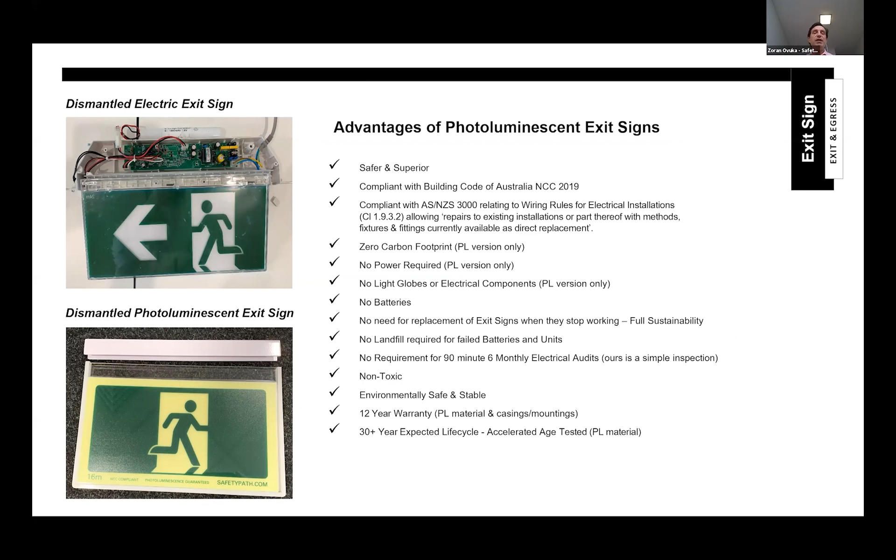That gives us a whole new opportunity to innovate in how we see our roads, making them better and safer. One of the things in terms of this technology, if we look at what's considered visible or safe enough around the world, in Europe the marker for safety of signage visibility using photoluminescence is 2.8 millicandelas per meter squared.

We can elaborate on this, and if you have further questions following this presentation, we can interact with you and give some background on what this all means. Essentially, it's about what the human eye sees, and how strong the signage should be for best visibility. In Europe, they're at 2.8 millicandelas for visibility. In the USA, they're at 5 millicandelas. And in Australia, we're at 30 millicandelas.

Australia was kind of late coming on board with photoluminescence in terms of infrastructure, but they've set the biggest benchmark. When we look at our performance, we way surpass even the local requirements, and our aim is to really make light from photons all night long in the future. So we are now able to provide systems which are very, very high performing and give great possibilities in road safety, signage, line marking, and so forth.

One of these solutions, as you can see in this next slide, is signage. What happens with signage is that it meets all the high grade class 1W, or however you refer to it, high-end reflectivity requirements, but also self-illumination. Reflectivity is only good when you have light at the right angle coming into it. By having self-illumination, if you're going around curves or going up and down, you get better visibility of a particular sign.

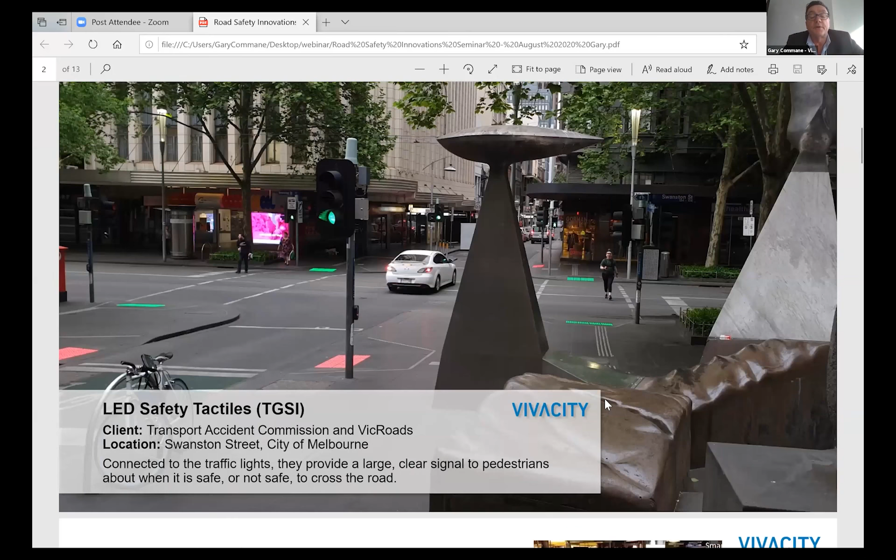Okay, the LED, this is the tactiles that we installed into the City of Melbourne. This is a project we did with TAC and VicRoads. We started this about 2 years ago, and the first installation was done in the City of Melbourne at Little Collins and Swanston Street, which you can see in that picture there.

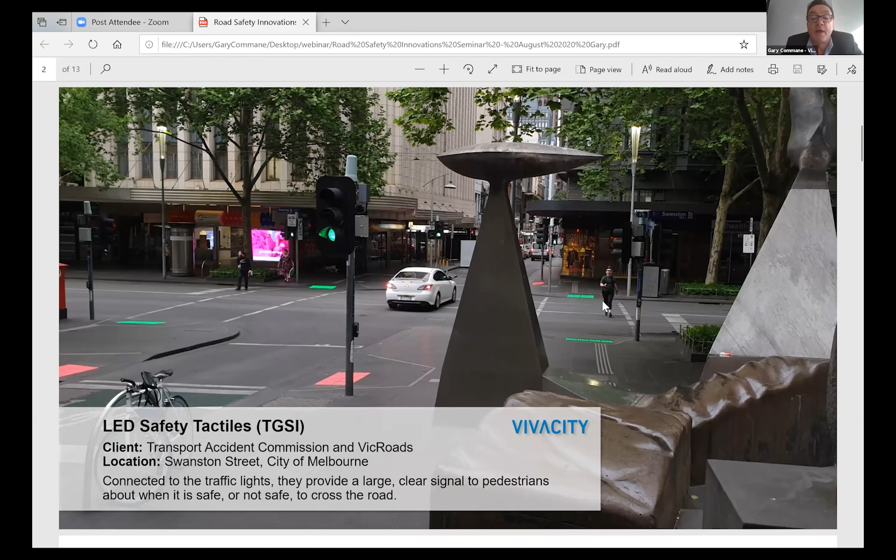The tactiles were initially designed to help with the problem of people not looking up from their phones before stepping onto the road. The Vivacity safety blocks are installed in rows on the curb side of the intersection. They are connected to the traffic pedestrian lights and shine the same color as the pedestrian lights to create awareness of signal change at the intersection.

So when the green man is green, these are green. When they're red, they're red. When they blink, ours blink as well. So pedestrians are more cautious of traffic and have quick awareness of signal change.

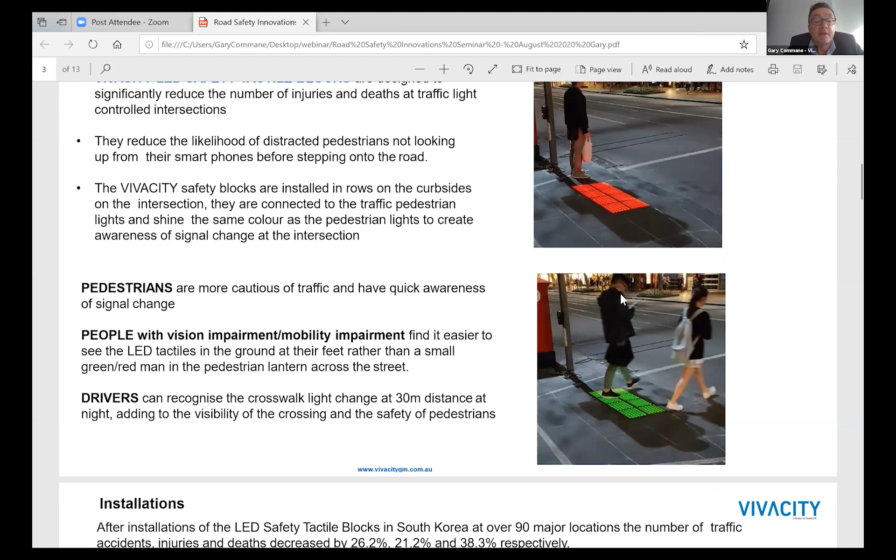People with vision impairment or mobility impairment find it easier to see the LED tactiles in the ground at their feet rather than a small green man in a pedestrian lantern across the street. Also, drivers can recognize the crosswalk light change at 30 meters distance at night, adding to the visibility of the crossing and the safety of the pedestrian.

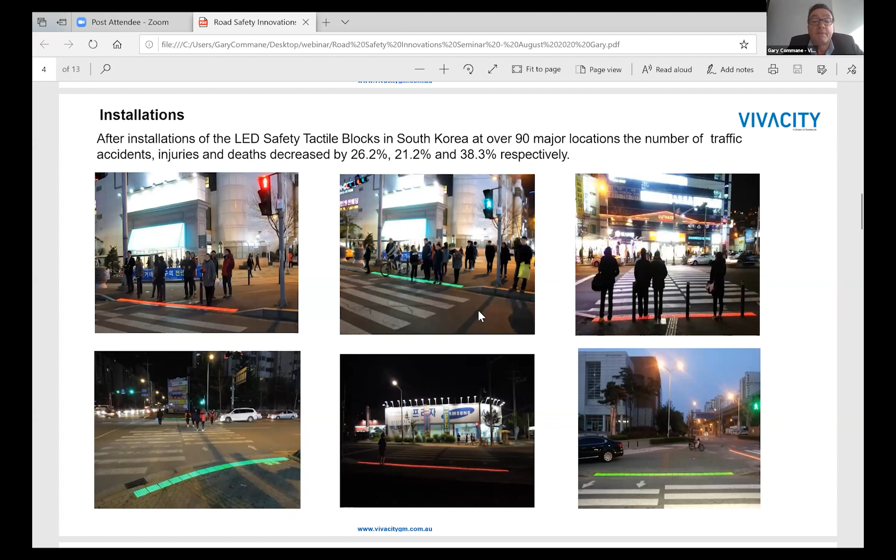The technology comes out of South Korea. After installations at 90 intersections, the number of traffic accidents, injuries, and deaths decreased by 26.2%, 21.2%, and 38.3% respectively.

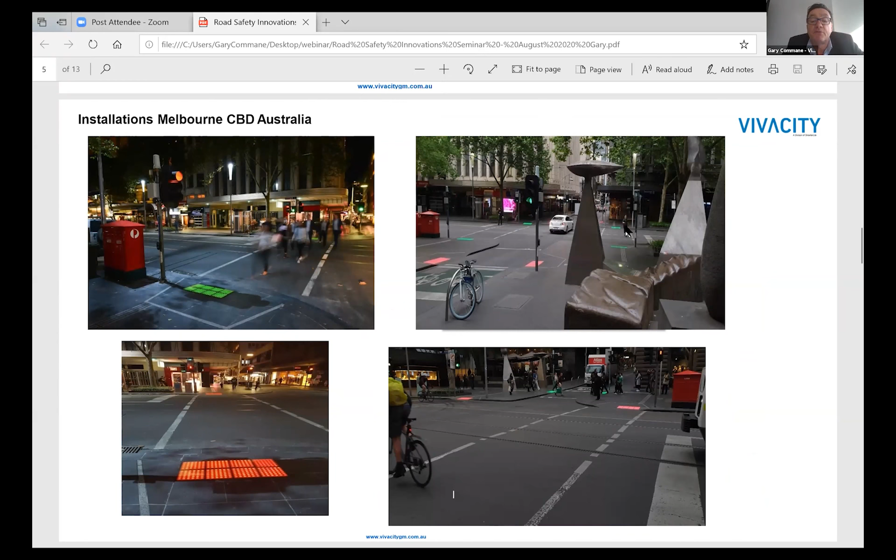The next slide here shows the installation in Melbourne. The images on the left are nighttime visibility, and the images on the right are daytime visibility. What we have done in these particular units is fitted into our control box ambient sensors, so these sensors pick up the daylight, how much light's available, and they dim these tactiles down accordingly.

So during the night, these tactiles are dimmed down to about 70% of the daytime brightness. This is obviously adjustable, but this is what we set with City of Melbourne VicRoads to make this intersection perfect in day and in night.

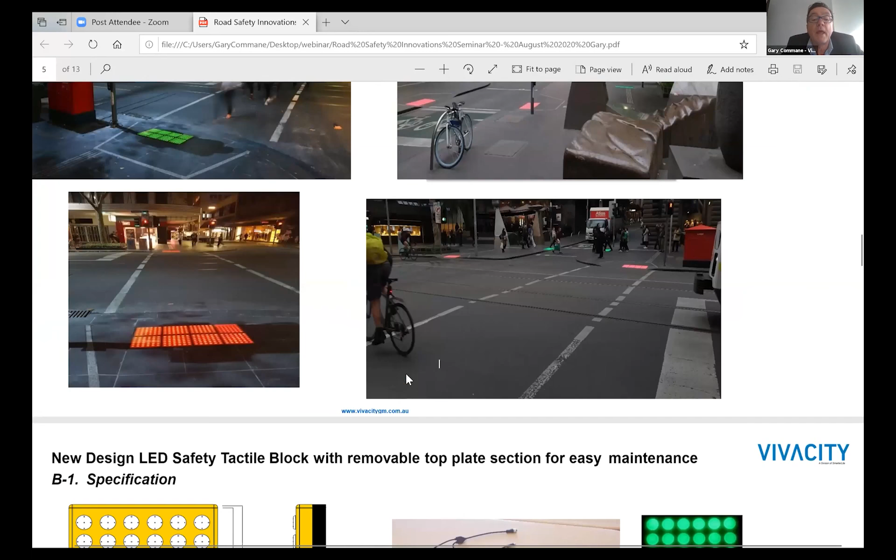So what is a tactile? Basically, our LED tactile is the exact same as a normal standard TGSI, which you can see on the left. It is the same dimensions, has the same number of bumps and lumps. Everything is the exact same as a tactile block. All we've done is added our technology to an existing tactile.

Our tactile consists of 2 parts: the base plate, which is fitted into the ground first, and we supply the DC wires, and this is our top plate, which changes from red to green.

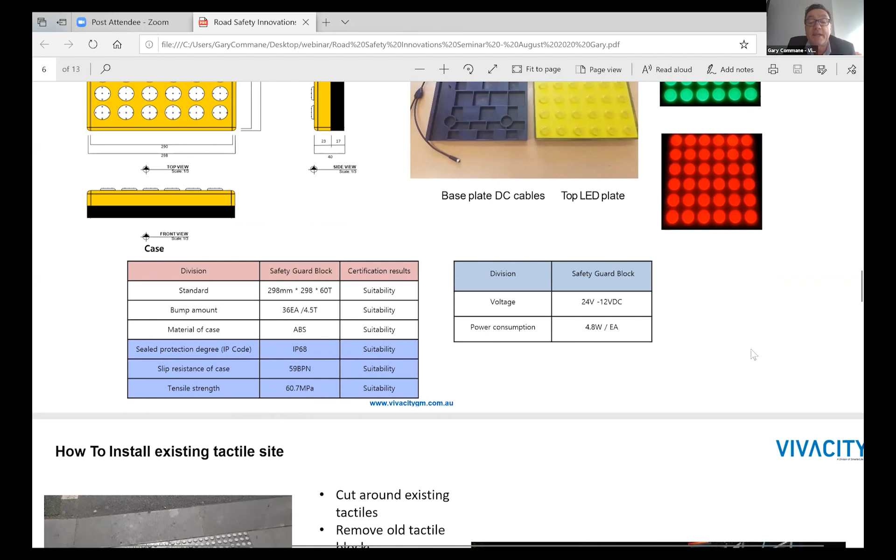Our tactile block is IP68. It passes all the slip resistant tests and tensile strength tests. It's low voltage, 24 volt DC, 4.8 watts, so it uses hardly any power.

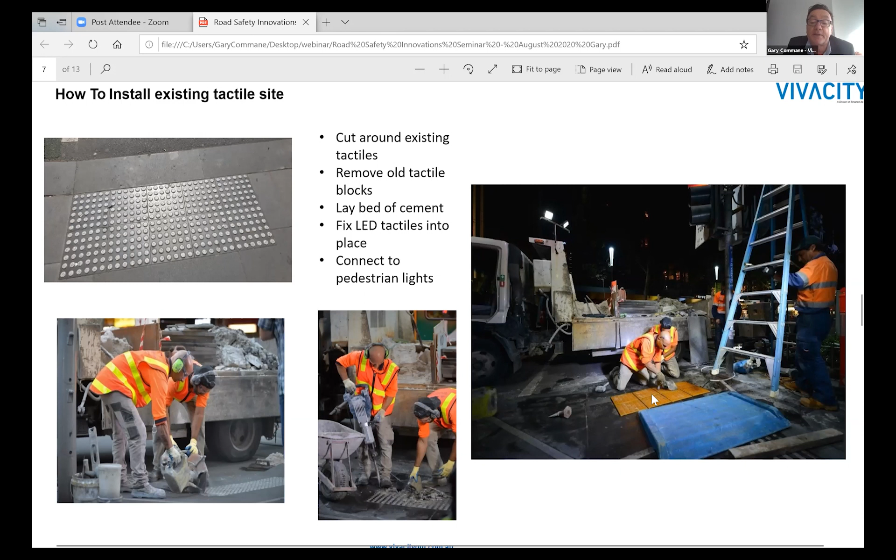To install our tactiles in the City of Melbourne, on the left you can see the existing tactiles. We just cut these tactiles out of the ground, lay a bed of cement, install our tactiles, and as you can see here, we just run a DC wire under the pavers, up the pole, and into the connection point of the pedestrian lights.

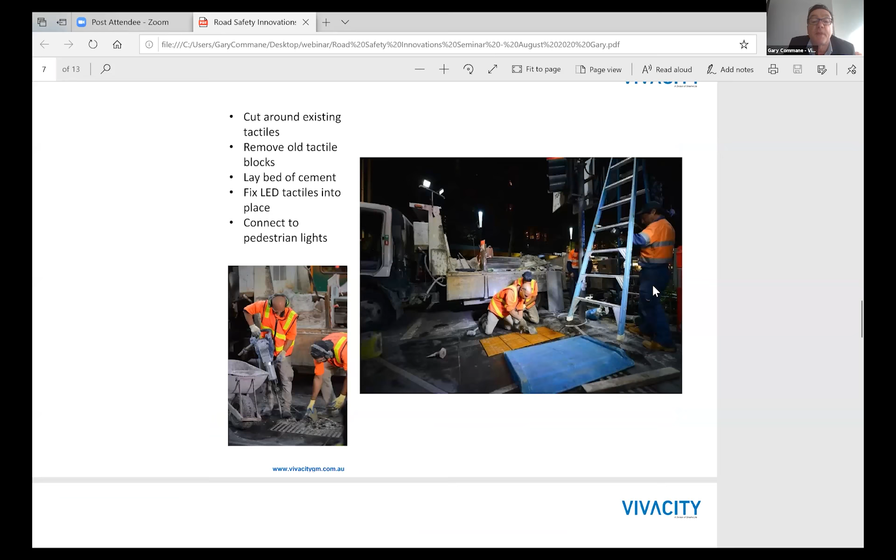If it's a new intersection, all we do is cut out the pavement, lay in our base tactiles, lay our DC wires into it, and connect the tactiles into it.

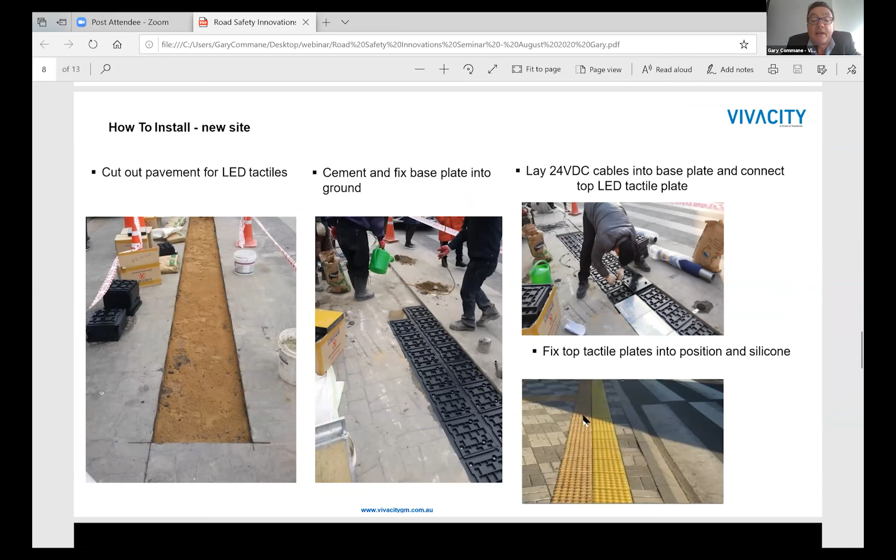So what I'm going to quickly show you now is what these tactiles look like. This is it here, this is the basic tactile.

This color is white. We can also make the tactile yellow, depending on what you want to have. City of Melbourne chose white because white seems to be the new color that's being used at the moment. As you can see, the top section of the tactile can be easily removed if ever we have a fault. There's a simple connection here that we can just take out of the top, unscrew it, and then fit a new tactile into position.

This is what the tactile looks like when it's illuminated. The tactile is normally red until someone comes along and pushes a button, and it changes it to green.

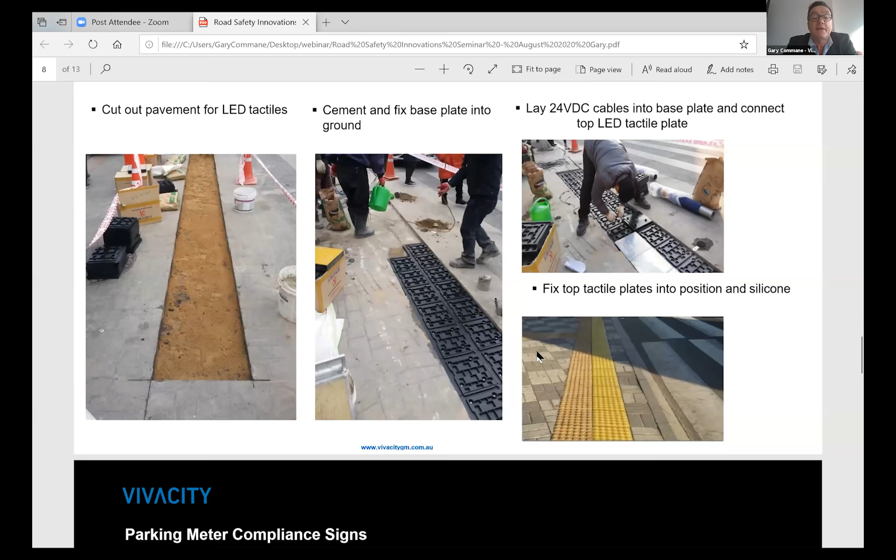Okay, I'm going to go back to the screen again, and we're going to go on to the next product. You probably would have seen these all around Melbourne. These are digital display boxes that we put on top of parking meters. This is a project we did with City of Melbourne, and it shows how we can make technology to solve a problem.

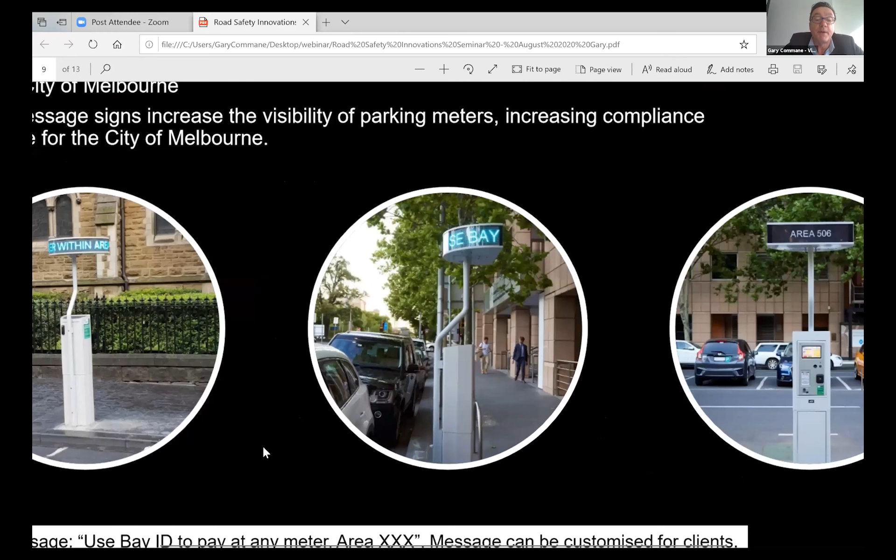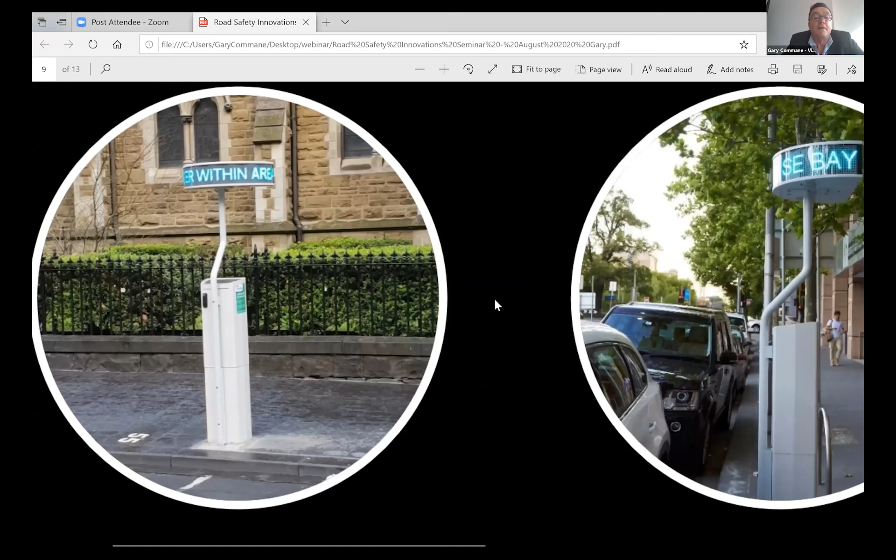The problem we had with parking meters was that people were avoiding paying parking fines by saying they couldn't see the parking meter because it was hidden by a car. So City of Melbourne asked us, could we develop something that made this parking meter more visible? The first brief was just put a light on top of a pole, and then it went from can you make the light flash, can you make the light spin?

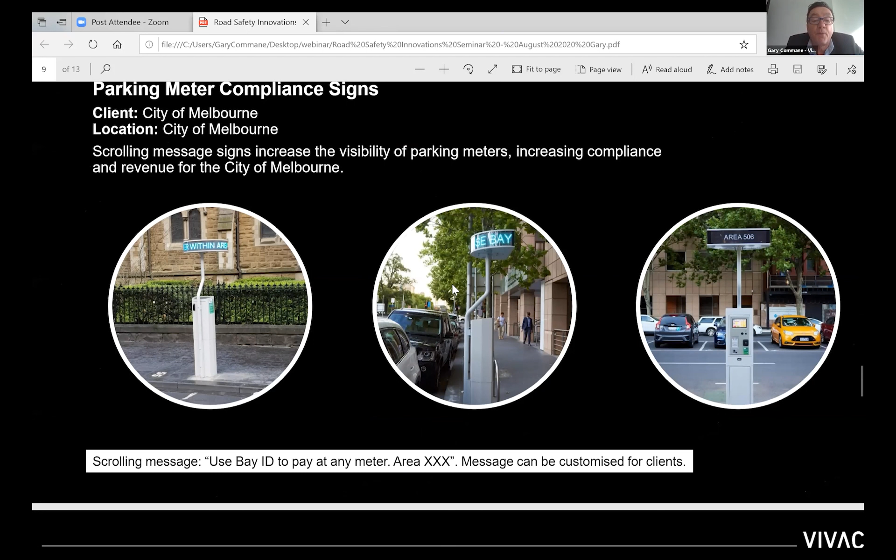In the end, we ended up having a full-blown digital screen. This screen shows the parking bay number and where the parking meter is. One of the other benefits is that we can schedule 6 months advance content into the screen, and it can also be remotely accessed if there's a problem or an emergency, to display an emergency message.

The next product I want to talk about is LED stud lights. These lights are quite unusual in that the ones on the left have no solar panels. The benefit is that we can install these units where there is little or no sunlight. The internal battery is a very high-end lithium battery, and when on permanently, they last for 5 years. If blinking, which is the normal way these operate, the life of these lights is 10 years. So basically you just put them into the ground and forget about them.

A quick look to show you what these lights look like: these are two very small lights. This section is the internal lithium battery. As you can see, they're not on - they only come on if I put my hand over them, and you can see it blinking. They have ambient sensors, so they come on at dusk or dawn. We can also have one that is on day and night - you can probably see this is in daylight and it's still quite visible. We recently installed 5 of these in the new police station on Swanston Street.

Right, let's go back onto the next project we're talking about.

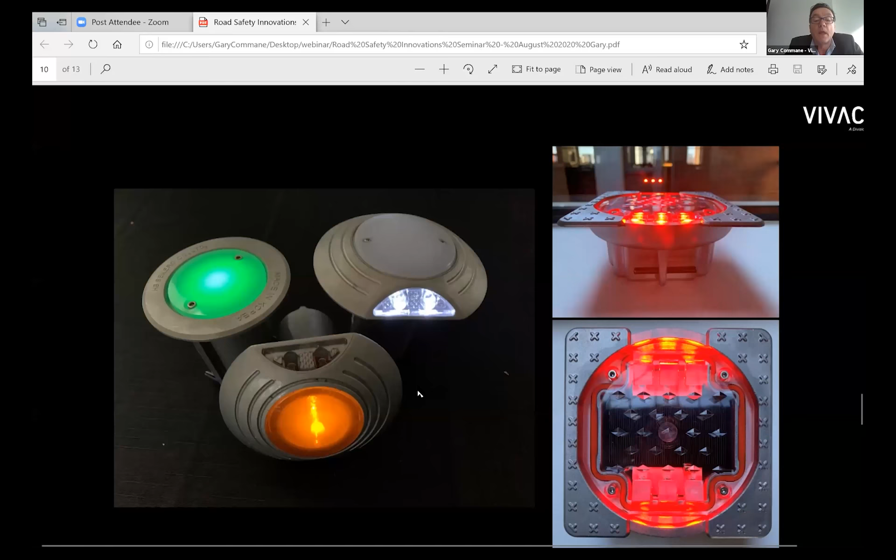This is a very clever unit that we developed recently. It's a high efficiency, low wattage solar light designed to fit bus and tram stop flagpoles. This is the project we're doing with PTV. It has an integrated light sensor which switches the light on in the evening and off in the morning. It's a very simple, no electric, secure plug and play type fixture.

At full brightness, this light provides 18 lux at ground level. An activity sensor detects motion, and if there is no motion, the light's brightness will reduce down to 70% after 2 hours, and 50% if there's no movement after 4 hours. If movement is detected, the light returns to the previous light level for that set period of time.

The benefit of this light is, again, when the brief we were given with PTV - I have a sample here - this light only weighs 5.4 kilos. It just has a very simple connection point here. It can fit on any pole up to 74 mil, and most poles you see on the road are 60 mil, so this can very quickly fit on top of it. It's a very simple plug and play system that can be used for buses, tram stops, but also for bike lanes, walking paths, anywhere you don't have power. These lights can very easily be installed.

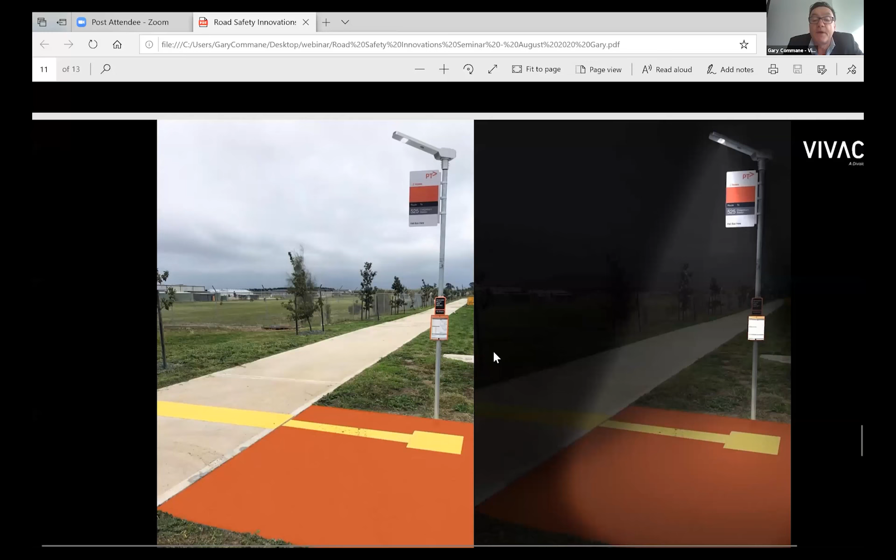This is the light that Zoran mentioned earlier, and it's what we call our hybrid light. Most street signs, as Zoran mentioned before, are like this - they have a reflective material, but our version is now fitted with a PL product. So it has the benefit of being a reflective sign, but also has the feature of adding PL into the substrate. This is our technology - this is our PL wafer. It's very flexible and can be fitted into any sign.

So what we do with our hybrid sign, to keep this at peak performance, is introduce a technology called an LED wafer. This is a very unique technology with a 2 mil thick light guide plate with an LED strip on the edge. When the light goes into it, the light comes out through the face of the panel. We fit this panel behind the PL substrate, then fit the reflective material or sign on front of the substrate, and we end up with a very thin sign. This little device uses very little power - this sign is 0.5 of a watt.

So what we do to keep our PL fully charged, we turn this light on for 30 seconds every 2 hours. We have a micro battery system in the back of our light, which is the same technology that's in these solar lights. And we end up with a sign, like this chevron sign we made for Regional Roads Victoria. This is size 1000 by 780. Again, this comes on every 2 hours for 30 seconds, and it keeps it fully charged.

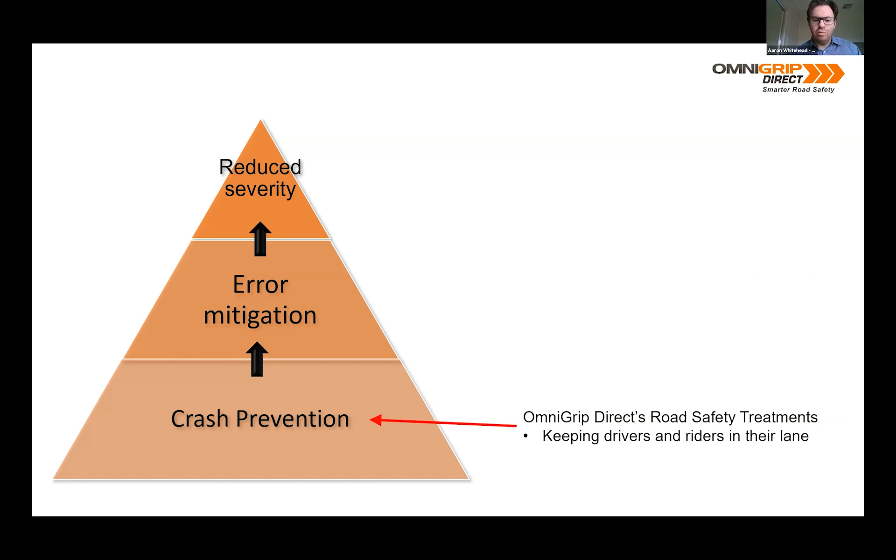So what is high friction surface treatment? To sum it up in short, it's a 2-part epoxy resin system that we've developed, a unique binding system, coupled with our calcined bauxite aggregate. That makes our product 100% compliant to the Vic Roads specification standards, 430, which are on high friction surface treatment. So the skid resistance value and the polished stone value exceed 70 - the highest in the market.

The key function is effectively to increase the level of friction between the tyre and the surface of the road. So what that does is advance the responsiveness of braking to stop cars going out of control, changing lanes, or having a serious accident.

It's ideally suited for areas such as roundabouts, regional roads, sharp curves, freeway on-ramps, major intersections, and approaches to pedestrian crossings. It's particularly prevalent on regional roads where you get a lot of tourists who are maybe not familiar with particular areas, travelling on poorly lit roads with certain bends and sharp curves that can surprise them unexpectedly. So this material is really advantageous for those scenarios.

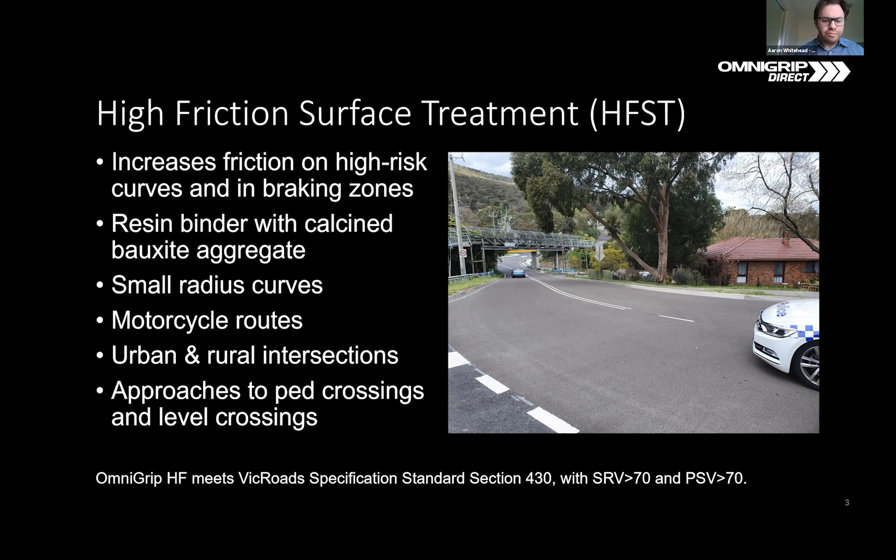With respect to the screen you're looking at now, the data and analytical findings around the use of high friction substantiate the effectiveness of our product. You've got a couple of different data findings there, one from Vic Roads and the other from Simpson. Used correctly in the right areas, our material is highly effective at reducing injuries and saving lives, and that's one of the key mantras and real endeavours of OmniGrip Direct. It's about road safety and keeping everyone safe on the roads.

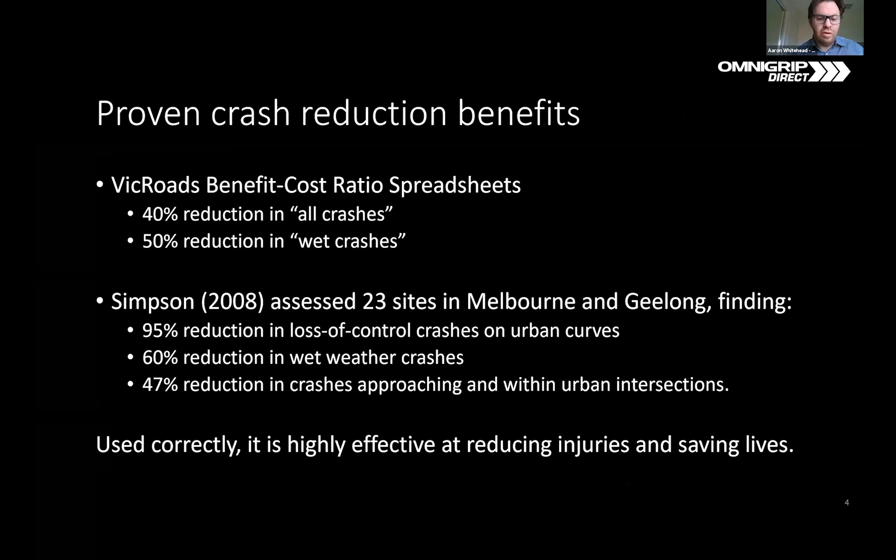Now, what I'm going to show you is a video. The high friction material is clearly evident on the left, and the standard asphalt surface is on the right. I'm just going to play this video for you now, guys. If there's a little bit of a buffer issue, I apologise - we've tried this previously, but there's been a few challenges. Hopefully this plays for you.

The car on the left is driving on a specially treated road. The one on the right isn't. Watch the difference as they stop.

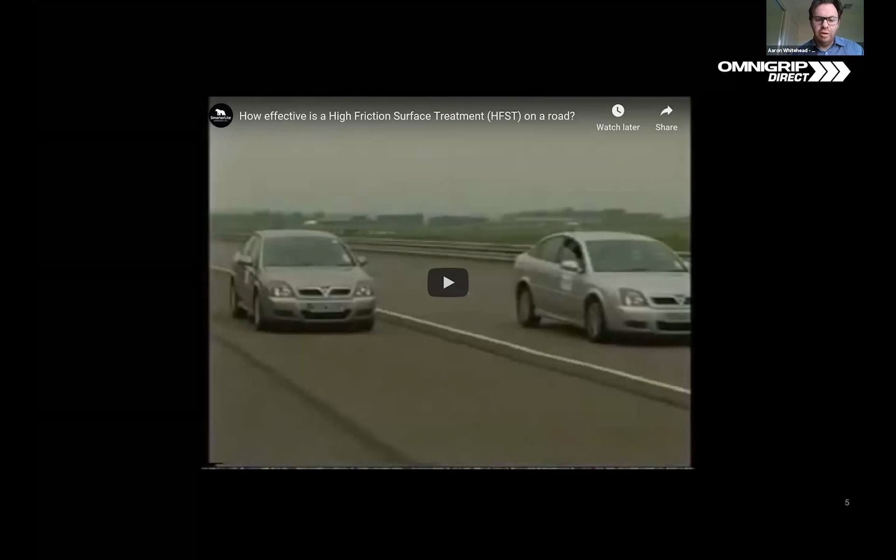So it's quite a powerful video, and it clearly shows that 2 or 3 seconds can be the difference between saving somebody's life. It's a really powerful video.

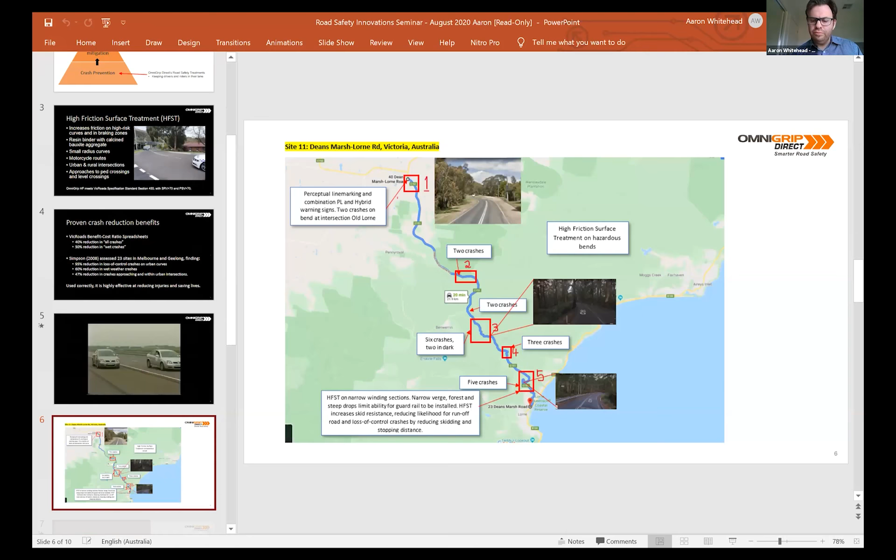So what you're looking at here, guys, is an example of a proposal that we put together for Regional Roads Victoria. This is one of 12 locations we isolated and put a lot of work into based on crash data and evidence to suggest there would be a very beneficial application point for our material. We can do that for anyone listening, for your organisation. So we've identified 5 key areas where installing high friction is going to be beneficial to reducing the number of crashes in this particular area.

Now, this road is a very windy road, quite dense, with a lot of forest surrounding the area. So access can be quite challenging for other mechanisms and methods of preventing crashes. The high friction treatment is able to be done either during the day or at night, depending on the requirements of the client. This is a good example of what we can do for you guys.

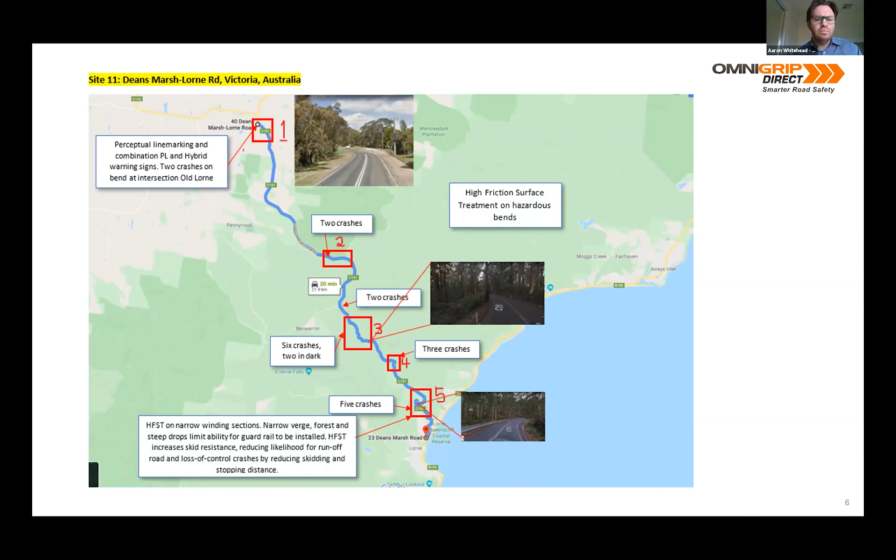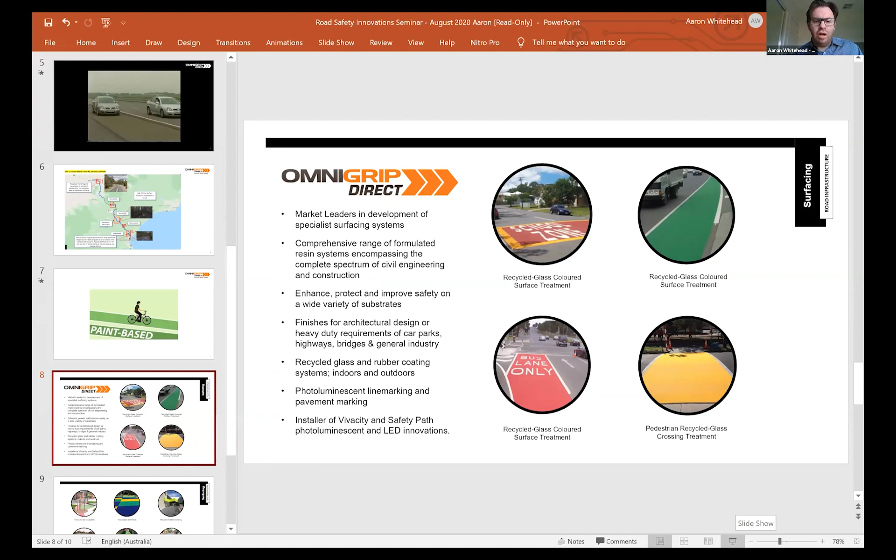So that was a 2-minute video giving a high-level synopsis of what our coloured surface treatment can do in the market. Now there's a couple of things I'd like to touch on in relation to that video, primarily around the durability and the functionality of our recycled glass.

In many instances there are hybrid alternatives out in the market, and in many cases paint-based applications. What we can do is offer a 5 to 7 year maintenance plan that enables us to maintain the asset for the entire life cycle of our material, and also amortize that over a period of time. So you're getting a complete solution, and you don't have the ongoing cost of applying paint every 12 to 18 months, because that's effectively the life cycle you get out of a paint-based product. It's a constant spend of taxpayers' money, and it's also not at the level of safety it could be. So that's one of the key benefits of the CST.

It's a solution you do once, and you'll get that functionality of 5 to 8 years. It's recycled glass, which means it's going to last longer. And the skid resistance again meets the specification of VicRoads 431.

A couple of examples you're looking at there: a school zone crossing, the cycle lane on the top right which is our emerald green, a bus lane in the bottom left which is our raspberry red, and then our pedestrian crossing which is the Homebush yellow. They're becoming a lot more regular in terms of our installations, particularly at schools. It's very bright, very visible, and makes it very safe for children.